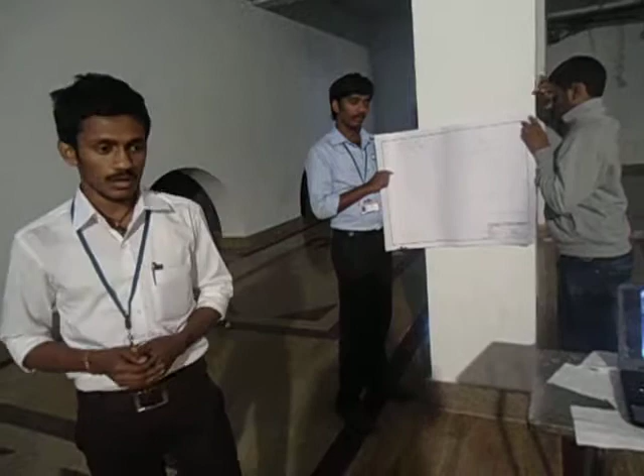Discussing the streamlined building, how we took up this project and why: all of us know how the Hudhud cyclone affected Visakhapatnam city a few months ago. Due to the Hudhud cyclone, Visakhapatnam was totally affected and collapsed, and one could say the city was totally drowned.

All this is due to the very high winds and cyclones caused by the Hudhud cyclone. Can't our constructions withstand such conditions? Yes, we can withstand them by constructing a streamlined building. So what is a streamlined body? A streamlined body is one which can attain very low pressure for a certain velocity relative to the surface area.

The theory of flow says that as velocity increases, pressure decreases, and as velocity decreases, pressure increases. As the flow moves, it attains a certain velocity. When this flow hits the building, the velocity becomes zero and the pressure drastically increases. Due to this increase in pressure force, the building gets collapsed or damaged, leading to buildings getting drowned and destroyed.

Our team is focused on such problems, so we came up with a solution called the streamlined building. This is nothing but adopting the same aerodynamic principle used for cars and trains, applying streamlined construction theory to buildings. The main motto is to reduce the pressure force acting on the building, so as to reduce the chance of failure even under high winds and cyclones.

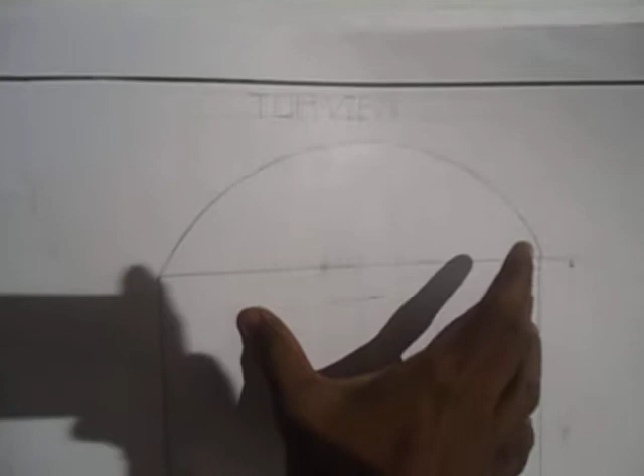With this design, the flow hits in such a way that only a small area is influenced by the flow, while the remaining flow just passes over the body, reducing pressure and increasing friction drag. This is one of the constructions we can adopt.

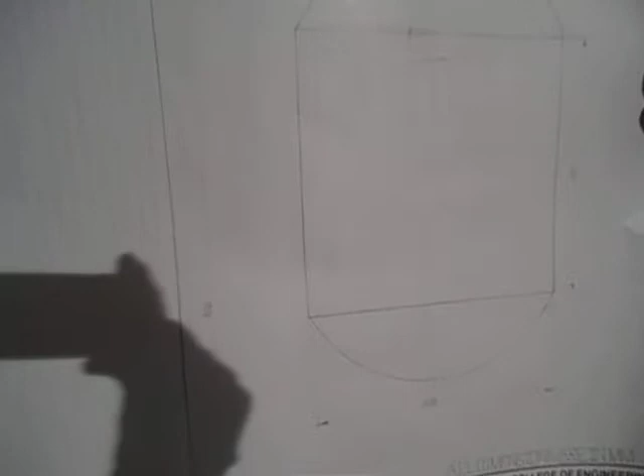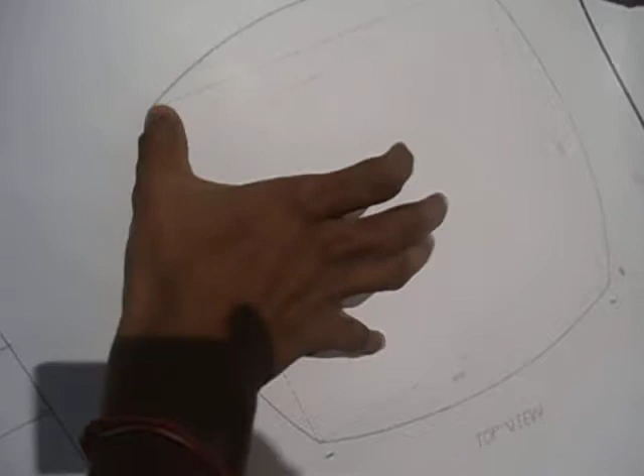The other approach is the formation of a windshield. A windshield means we don't need to make an entirely new streamlined building; by making very minor changes to present constructions, we can convert the building into a streamlined one. By taking the midpoint and the joining point, we make an arc in such a way that all the arcs are formed, and by this the body is totally converted from a bluff body to a streamlined one.

From the bluff body, this is one kind of pattern that we have adopted for present constructions.

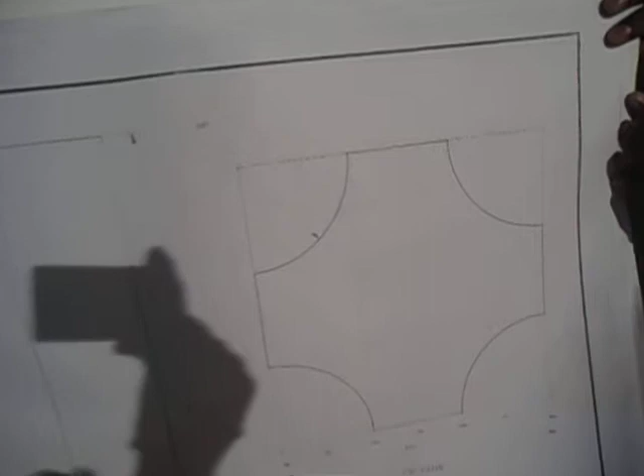For future constructions, as we build smart cities, we need new buildings and constructions designed in this streamlined manner.

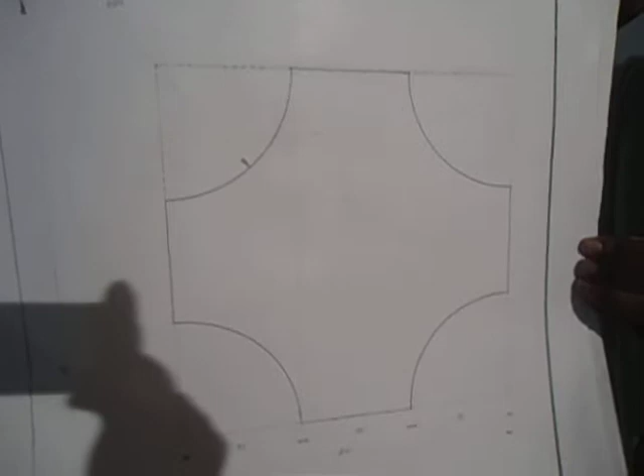This kind of construction is very effective in our designing and analysis part, because when the flow is going to hit, it is only hitting this part and the flow is going to separate in this way. And if the flow comes from the front, back or sides, the flow pattern is the same. So the pressure impact is only upon this part, so we can reduce the pressure force acting on the building. By this the building can withstand even very high velocity flows.

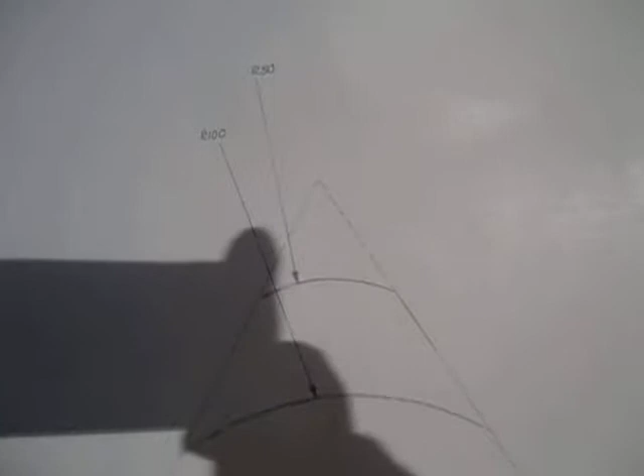And coming to our concept four, it is the top view of the building. The front view of the building is common to every building, depending upon the height that we require, and the top view is in a pattern making the arc in such a way that it converts the triangle into a semicircle. By this we can reduce the area of impact of the flow acting on the body, and reduce the pressure force.

And it is the pattern of concept 5, and we are making the curvature at the top of the triangle. In a similar pattern we are making slots in this way. By this we can make a flow separation in this pattern and reduce the pressure.

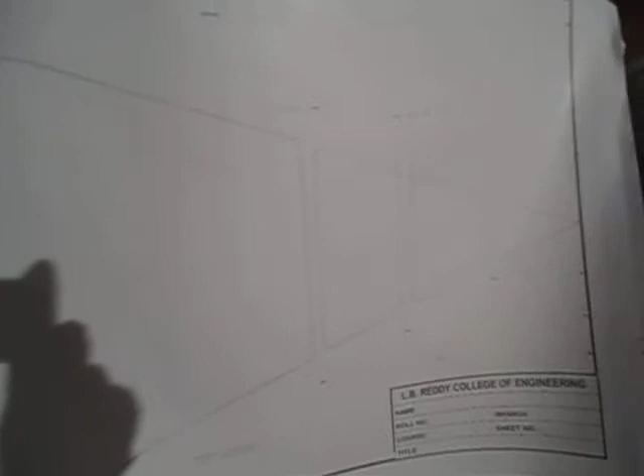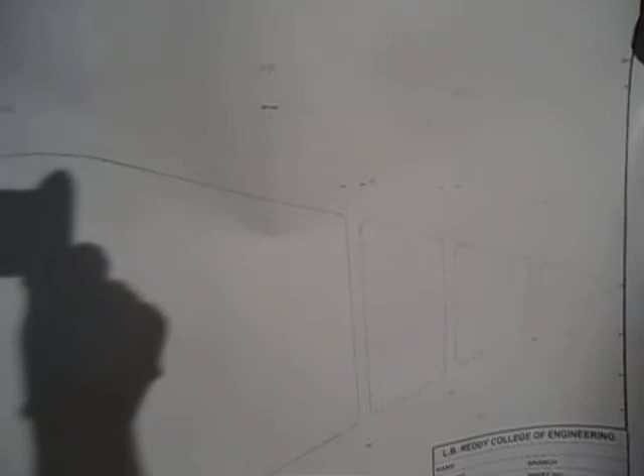It is used in the construction of very high buildings such as industries, factories, as well as institutions and ventures. In such a way we can use this kind of construction to withstand very high velocity flows.

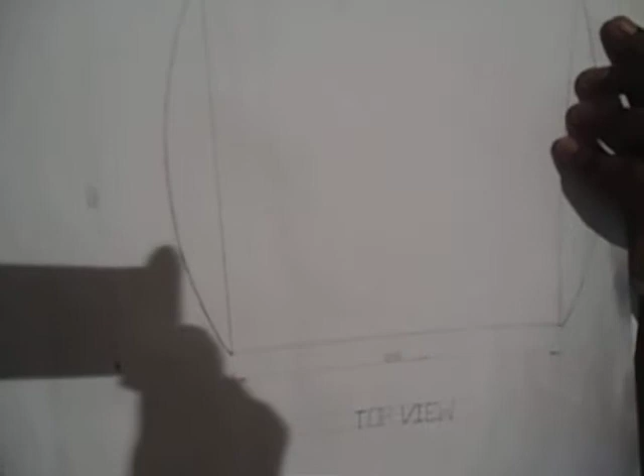And finally, our last concept, number 7, is none other than the slotted building. Hearing "slotted building," we may wonder whether this kind of building can work or not. But we know that the construction of the building mainly depends upon the strength. That strength is mainly based upon the construction of the pillars as well as the slab. But minor slots do not impact any such things.

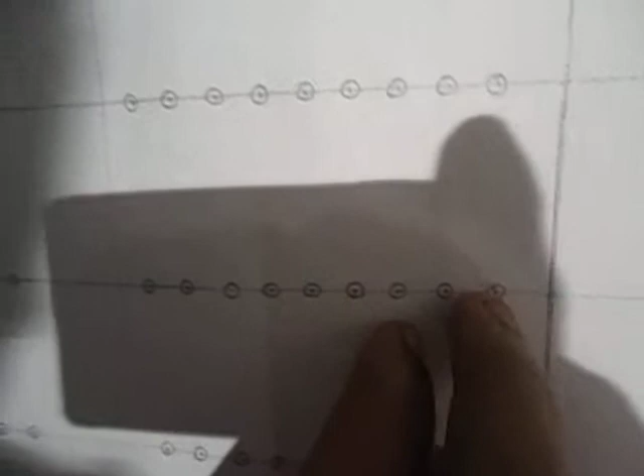My holes of 30 mm are placed upon the slab, which pass throughout the building. So these very minor slots do not make any impact on the building. By this we can even reduce the pressure acting on the body.

And this is the top view of the building that we are going to construct, making a curvilinear path, because with flow on the front side and the back side we can reduce the pressure. But in exceptional cases such as side flow, the building should still withstand, so we are making a curvilinear path. By this we can reduce the pressure acting on the body.

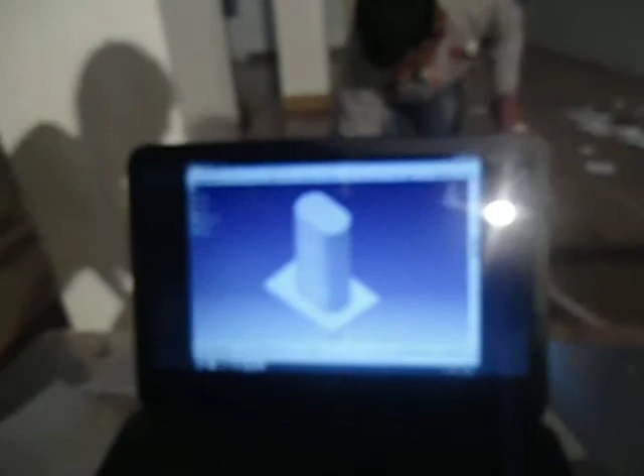And this is the blueprint that we have made regarding the streamlined buildings. These are the designs that we made in CATIA. It is concept number 1, concept number 2 of the streamlined building, concept number 3, concept number 4, and finally concept number 5.

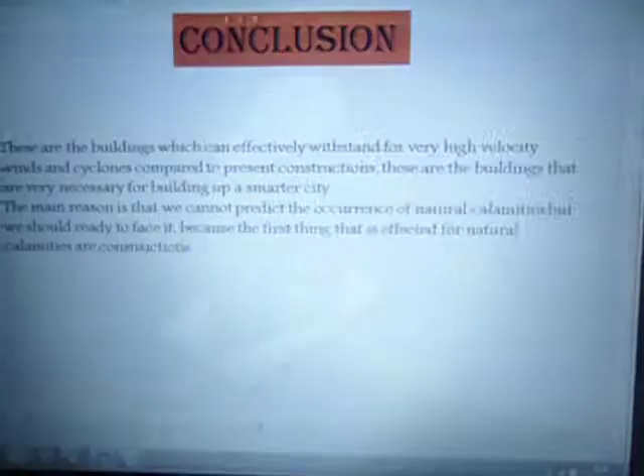These are the 5 concepts that we have designed in CATIA, and now we need to do analysis on these bodies to see whether they work efficiently or not. We surely guarantee that these are effective in pressure reduction, and we hope that this project will have great success. Thank you.